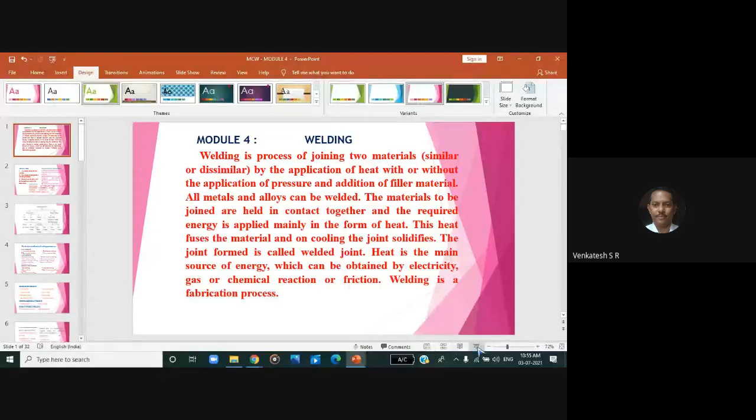All of you, please write down module 4, welding. Module 4, welding. What is the definition of welding? All of you studied the joining process in second semester. There you studied arc welding, TIG, MIG, gas welding, soldering, and brazing. So in this chapter, you study the different types of arc welding processes and special welding processes.

So first you write down the definition of welding. Welding is the process of joining two materials, similar or dissimilar, by the application of heat, with or without the application of pressure, and addition of filler metal. Underline the complete definition. Keep the definition in inverted commas. Once again, what is the welding definition?

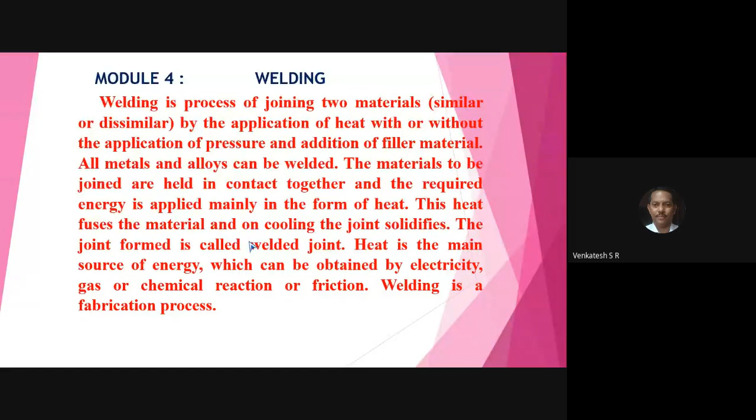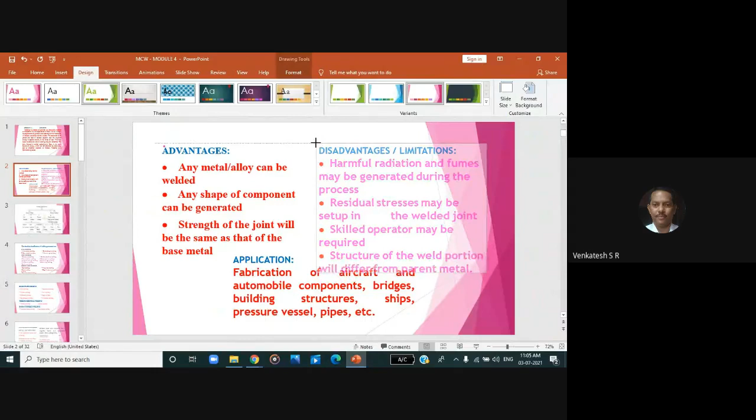And one more thing, you may have this question in competitive examinations. Welding is a fabrication process. Remember, in your lifetime, welding is a fabrication process. Underline the sentence. Next, write down. In some question papers, you have a question on list the advantages, disadvantages or limitations and applications of the welding process.

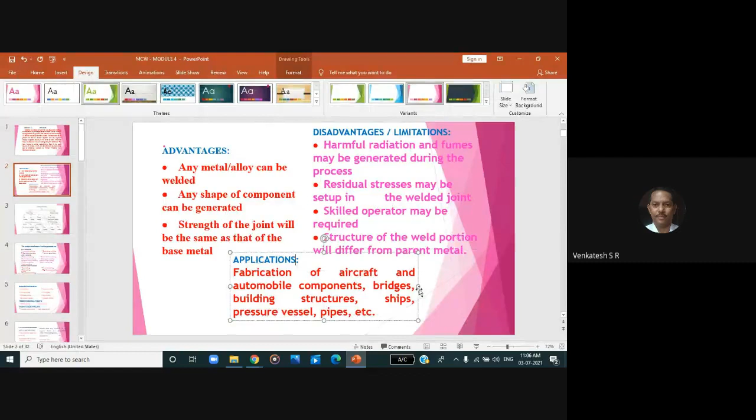All of you write down first advantages. Underline that, put a colon. Number one advantage of welding process: any metal/alloy can be welded. Meaning of this sentence is, you can weld any type of metal, similar or dissimilar metal or alloy.

Next line, write down number two. Any shape of the component can be generated. Say in structural work or aesthetic work or any application, you can join two metals, you can produce any shape, size and dimension. Next line, number 3.

Strength of the joint will be the same as that of the base metal. Meaning of this advantage is the joint is so strong, the same type of structure is possible in the joint, whether it may be BCC or FCC. Suppose you have BCC structure in the base metal, the same type of BCC structure in the joint is also possible.

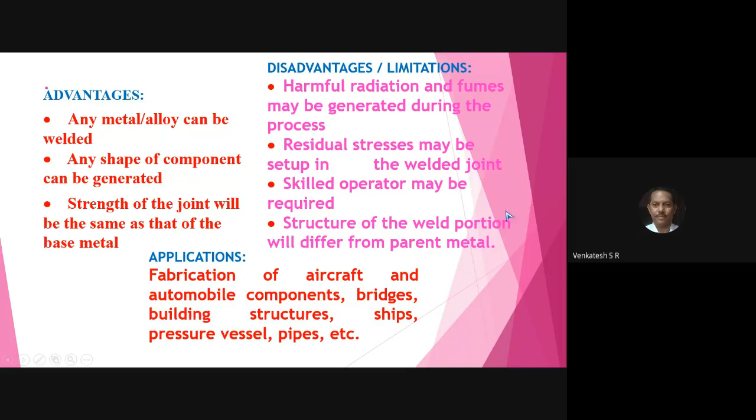In many question papers, you have this question. If you have this question in the exam, write the definition first. Welding is the process of joining similar or dissimilar metals by the application of heat, with or without pressure, and using filler metal. For heating, the heat can be produced by electrical current, gas, friction, and chemical reaction. So this much you write in the examination for this question.

Next, write down, very, very important: how do you classify the welding process? Write down classification of welding process. Underline that. Next, draw the block diagram or flow diagram like this. Write welding classification first, show the arrow mark and show two arrows like this.

On the left side, write down fusion welding. Right side, write down pressure welding. Fusion, the name itself indicates: fuse the ends of the workpieces to be joined by the application of heat or chemical reaction. You fuse the joint, making the joint liquid, and join the two components.

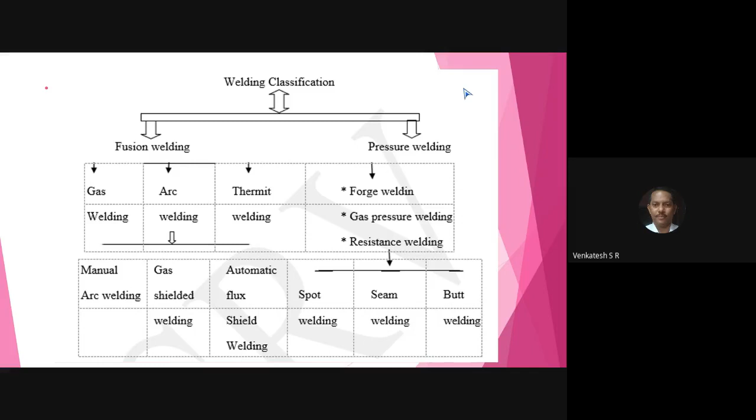In many question papers, they ask the question: explain briefly the welding classification. Write down the question. Explain briefly the welding classification. Welding classification. Now write down: the detailed classification of welding processes are, put a colon. Underline that.

First, write down gas welding. Below that, write down air-acetylene welding. In the process, you have seen oxyacetylene gas is used, oxygen and acetylene. Air is also used for the welding process, so write down air-acetylene welding. Hydrogen and oxygen are also used for the welding process. Write down oxy-hydrogen welding.

Next, write down oxyacetylene welding. Underline this. You have this in your syllabus; you have to study oxyacetylene welding. I think you already studied it in the second semester. This semester, you don't have oxyacetylene welding. Next, put an asterisk mark, gas pressure welding. Using oxygen, acetylene or hydrogen, you can produce the joint by the application of pressure. In some components, you require pressure to join two components.

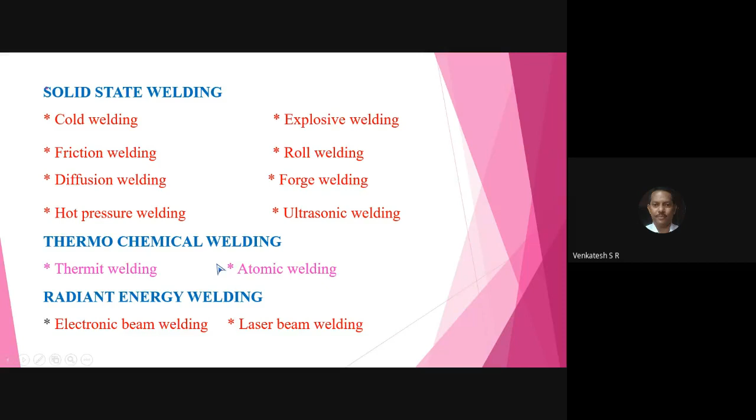This is very, very important for mechanical engineers. If anybody asks you to name the different welding processes, you have to answer solid state welding, special welding processes, thermochemical, radiant energy, and the common welding processes: arc welding, gas welding, resistance welding, which are used in fabrication and many more applications. Now, I stop at this stage.